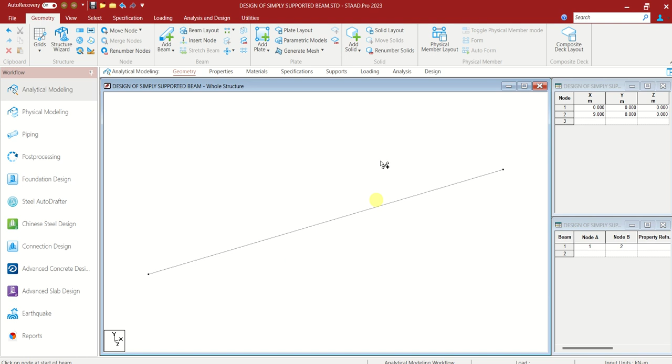You can see two nodes are created here. Let us add the beam. This is the option in geometry tab, beam panel, add beam option. You click once on that node, click once on this node. So this is a 2D beam, 2D diagram. Let us see that in front view and continue analysis.

Go to properties, we have done the geometry part. We have just created the beam. In properties, we have to give the cross-sectional dimensions. We have to choose standard, prismatic. In some versions it may be mentioned as define. So define or prismatic, we have to choose.

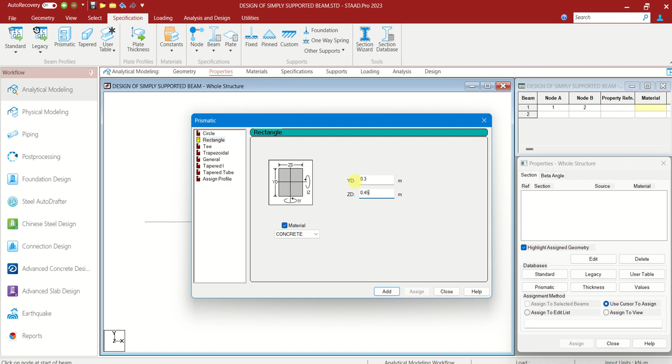Choose the rectangle. YD is 0.3 meter, ZD is 0.45, so that is 450 by 300 millimeter. Close. This has to be assigned to this beam. Choose the section we have created, assign to view, assign yes. It was assigned, showing in red color.

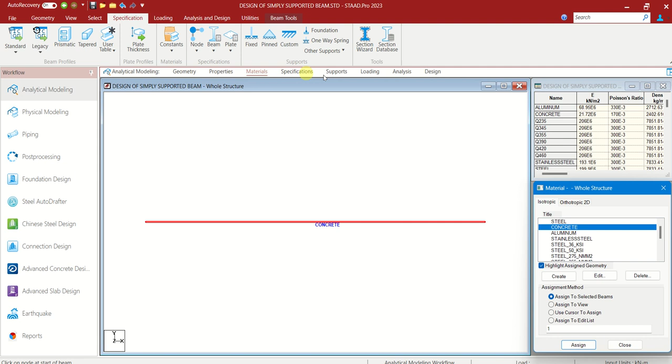Go to materials, you have to choose it as concrete because you are designing a concrete beam. Assign to view, assign yes. Assign to view is something which selects everything on this window. Since it's only one beam, I am choosing this assign to view. Let us go to, no need to change the specifications.

Go to supports, create a support. First, since this is simply supported beam, one end is pinned. Select, add support to, there is a pin end we have created. Use cursor to assign, choose assign and place it here. Create one more support.

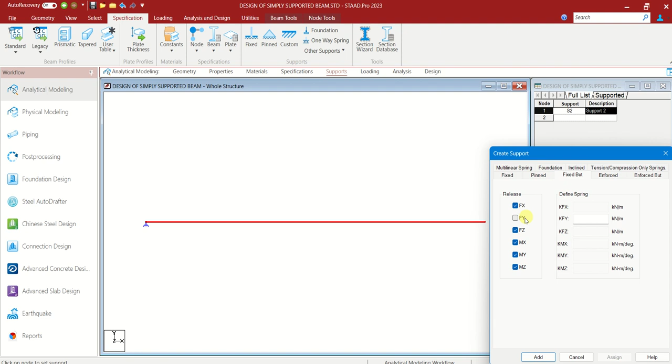That is roller support. Roller support is not directly available, so choose fixed but which can be customized. You have to release all the forces and moments except Fy, because this is having only vertical reaction. Add, so support 3, use cursor to assign, place it here. We have created the supports of the simply supported beam now.

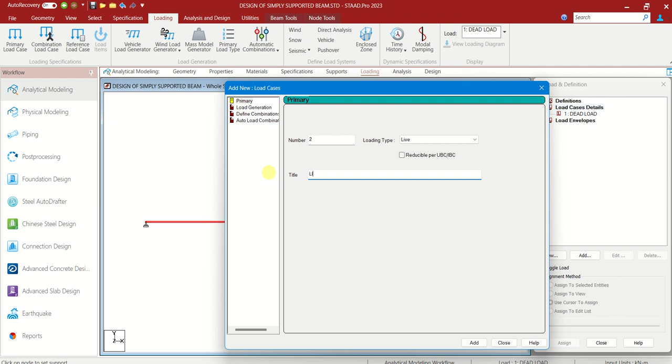Go to loading, go to load case details. Add, initially we have to give the name as dead load. Change the title as dead load, add or enter. Next choose live load, add it as live load. Change the name as live load, add, close.

Choose the dead load here, add. So we have just given names, now we are giving the magnitudes. This is mentioned as self weight in y direction, factor -1, that is fine, add, close. Below the dead load we have just created the self weight but not yet assigned, so it is showing red color question mark. Select that, assign to view, assign yes.

Now choose the live load, add. So these are the live loads we have to add: one concentrated load here, another UDL here, one more concentrated load here.

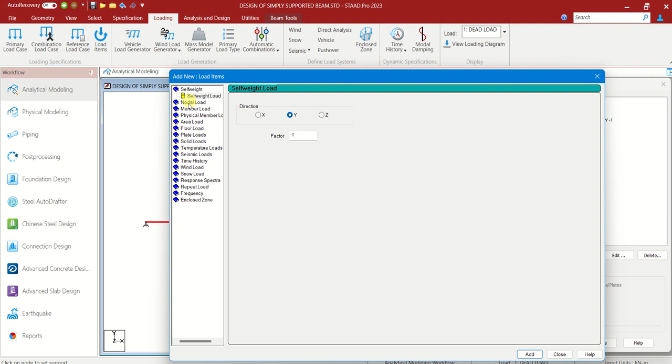Let us first add this concentrated load which is having magnitude 3 kilonewton at the distance 2 meter from the left support. Choose here in this list, member load, we have to select concentrated force. So P, this is -3 kilonewton, and the distance 2 meter from this. D1 is mentioned from the support, left support to the load. So this is 2 meter, load is 3 kilonewton, -3 because it is acting downward. Add. You can again add one more load here itself.

This is uniformly distributed load. Choose here uniform force, magnitude is 2 kilonewton per meter. Choose -2 because it is acting downwards.

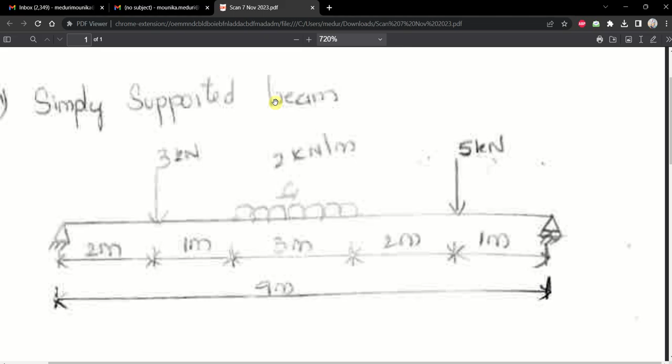Minus 2 kilonewton per meter. D1 is from the left support to the beginning of the UDL, and D2 is from the beginning to the end of the UDL. This distance would be D1, that is 2 plus 1, 3 meters.

D2 we have to see. D2 is from the beginning, left support, to the end of the UDL. So that is 2 plus 1 plus 3, that is 6 meters.

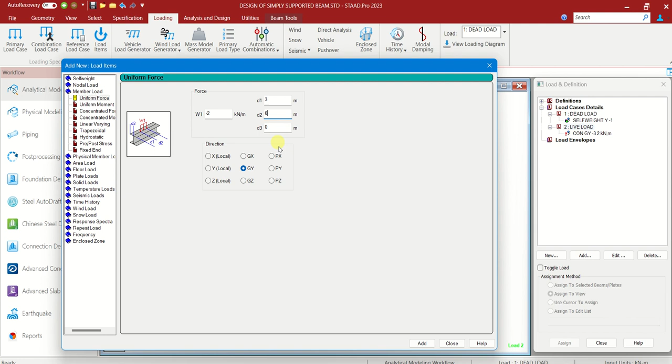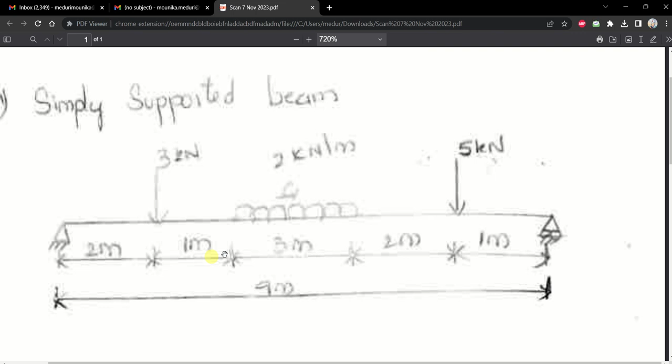6 meters, add. One more load is here, a concentrated load of 5 kilonewton, at the distance 2 plus 1 plus 3 plus 2, that is 8 meters from the left support. So give concentrated force, magnitude minus 5, D1 is plus 8 meters.

That's it, add, close. So this is the only beam we have. All these question marks indicate that these loads are not yet assigned.

So choose each load, assign to view, assign yes. Choose this load, assign to view, assign yes. Choose this load, assign to view, assign yes.

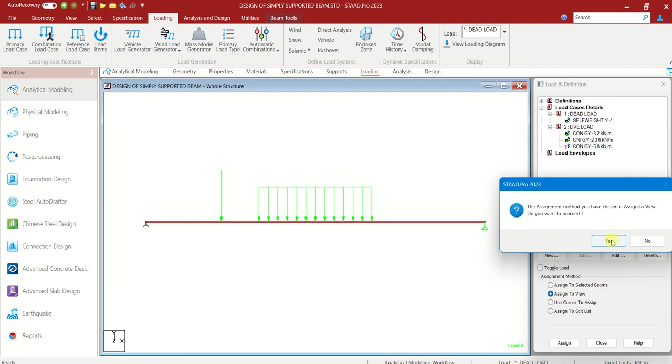And if you want to see the loading diagram, this is the option. Right click on this, labels. If you want to see the load values, click on that, apply. Now you can see how the loads are applied.

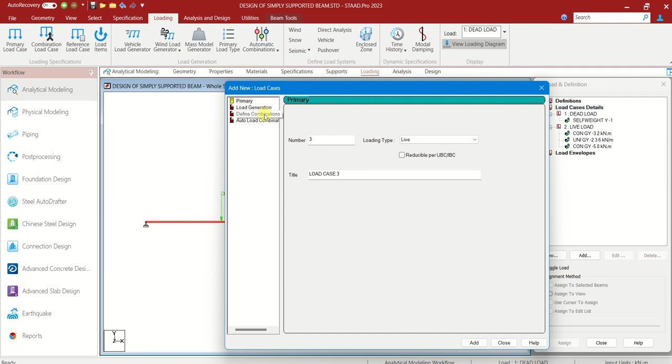Let us now choose the load case details, and we have to add one more load, the load combinations. So define combinations. Factor of safety for concrete is 1.5. Now shift the loads here, add, close.

So after loading, the next part is analysis. Choose analysis commands over here, select all to be analyzed, add, close. Pre-analysis commands, define commands, all, add, close.

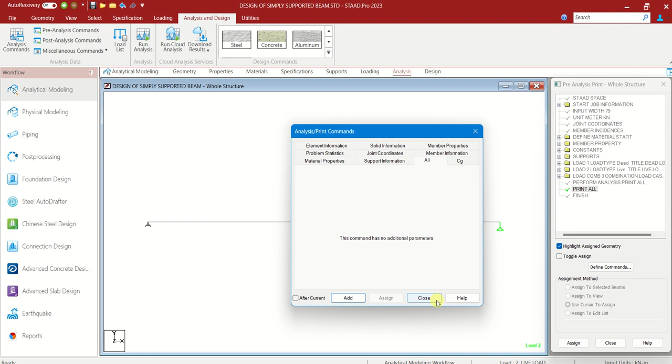Choose post-analysis commands, define commands. Here we have to shift all these three loads here, add. Choose analysis results, that will give you complete results whatever we want, close. Now run analysis, save the structure.

0 errors, done. Let us go for the design part. Design, you are going for concrete design, choose concrete here. Don't forget to choose the code as IS 456, Indian code we are using.

Define parameters, and here we have to choose FC. It is a grade, characteristic strength of concrete 20,000, M20 grade we are giving 20,000 kilonewton per meter square. And FY main, grade of main reinforcement 415000 kilonewton per meter square.

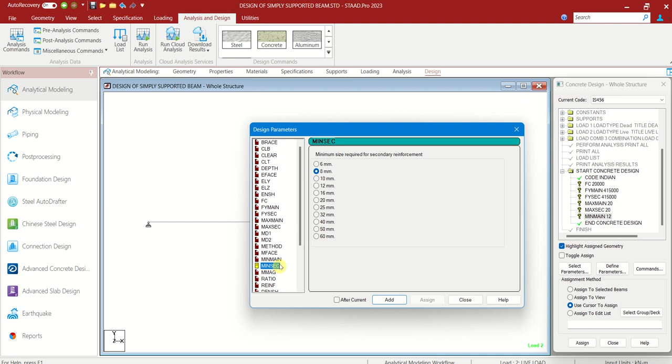And FY secondary 415000 kilonewton per meter square. Add maximum main reinforcement, we are giving it as 20 mm. Add maximum secondary reinforcement, it is mentioned in your observation, I think 20 mm. Minimum secondary reinforcement, we are providing 12 mm. And close. So you can see all the question marks over here.

It is the indication that it is not yet assigned. Select each of that, go to assign to view, assign yes. Choose this, assign to view, assign yes. Similarly for all.

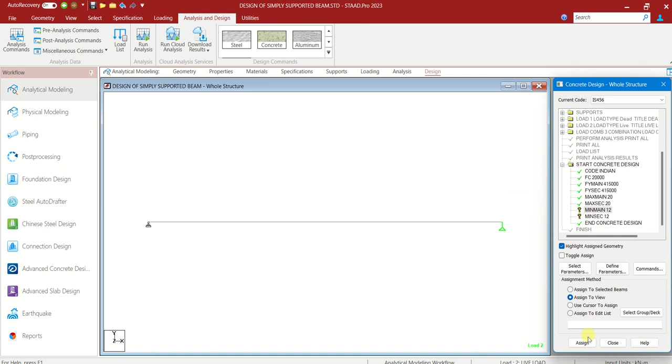Choose this, assign to view, assign yes. This, assign to view, assign yes. And this, assign to view, assign yes.

So now we have to give commands. Design beam, add, take off, add, close. Choose design beam, assign to view because there is only one beam. Yes. Now you can go to run analysis again.

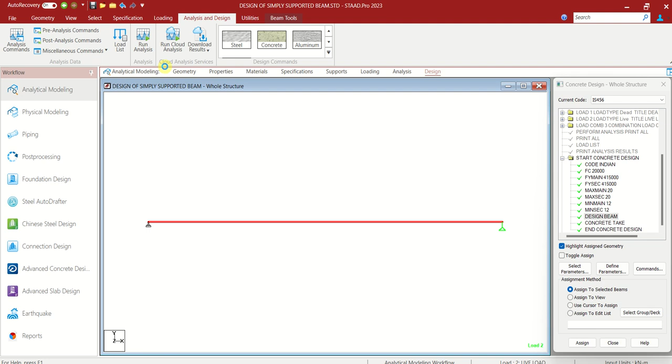So the initial run analysis is after giving analysis commands. Now we are running analysis after giving design parameters. Done.

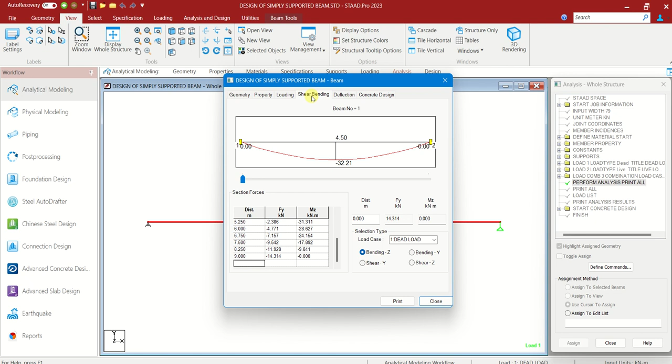Let us choose, okay. Just double click on that. You can see the geometry, all details, property, whatever the property you have given, initial loading, shear, bending, deflection, concrete design. You can see the reinforcement details over here.

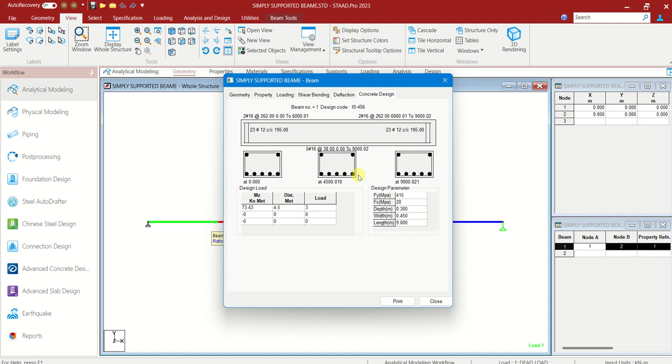Property. So you can see all the concrete design details, what load you have given according to the grade, and there is the reinforcement.

Similarly, you can do all kinds of beams like cantilever beam, continuous beam. For continuous beam, you have to create the nodes according to how many supports are there. And the remaining process of giving loads and analysis is similar to this simply supported beam. Thank you.